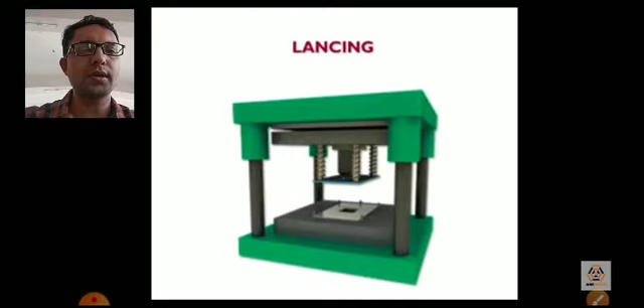So, let's start. First of all, there is a lancing operation. It's a sheet metal operation. This picture shows the machine in which we have done the lancing operation. Now, let me see what we mean by lancing. The equipment used for this operation is the stripper plate, punch, and die. In every operation, we require the punch and die, and also there is a sheet and the stripper plate.

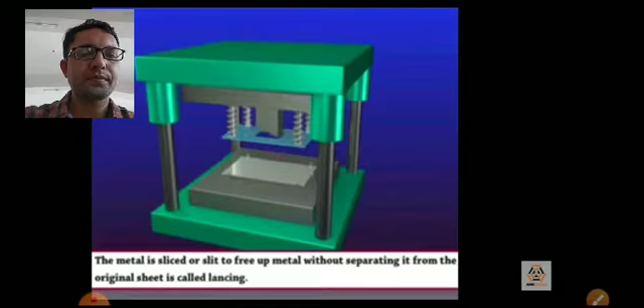The metal is sliced or slit to free up metal without separating it from the original sheet; this is called lancing. In the next slide, you will understand it in a better way. We have a separated sheet, but the sheet is not completely separate from the original part. That's simply called the lancing operation.

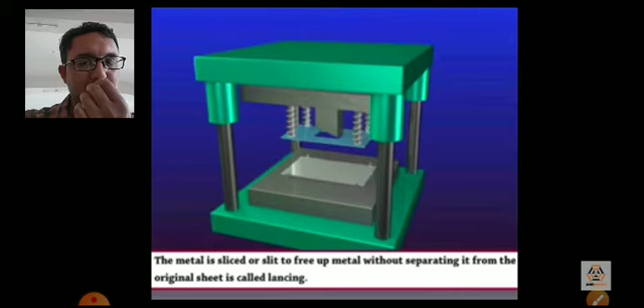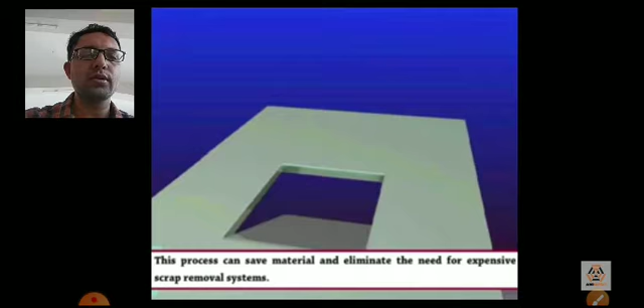Metal is sliced or slit to free up the metal without separating it from the original sheet; this is called lancing. As we have seen in this slide, no metal is removed and therefore no slug is created in this operation. So this process can save material and eliminate the need for expensive scrap removal systems.

The punch cuts the sheet partially and bends it down. Similar to the blanking and punching operations, here also we apply a punch on the sheet and it is cut, but it is not completely separated. It is cut only in slice form.

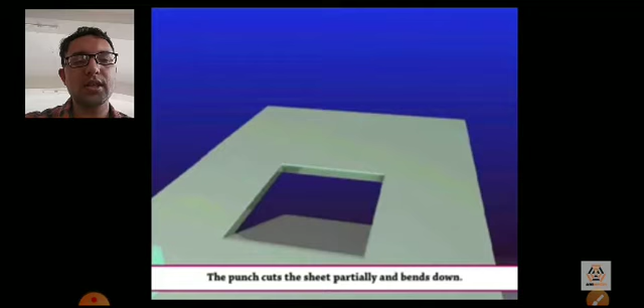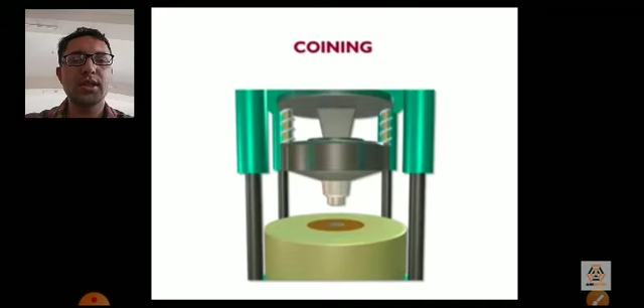Now, the next operation is coining, and coining is generally used to create a coin-type shape. This picture shows the machine on which we have done the coining operation, and coining is used to create raised surfaces and imprint the metal. There is one coin that we have put down, applying force with the help of the punch on the coin sheet, and it will create an impression.

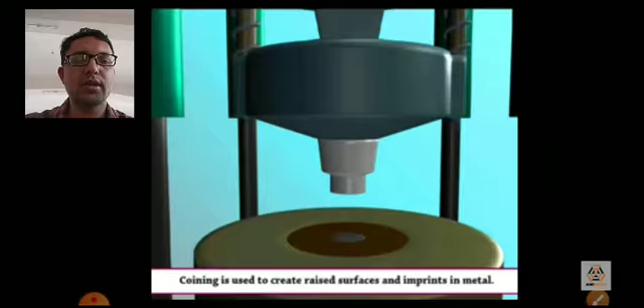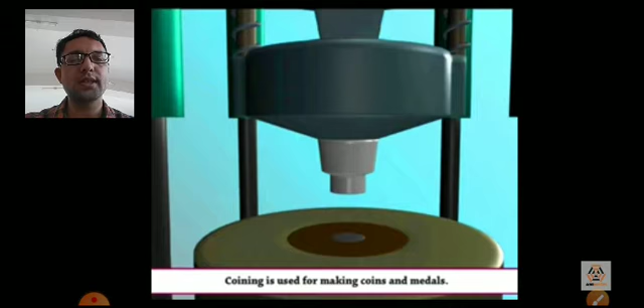So coining is used for making coins and medals. It's a very simple operation. It will create coins and medals. And after that, we have seen another operation in which an image is created on the coin.

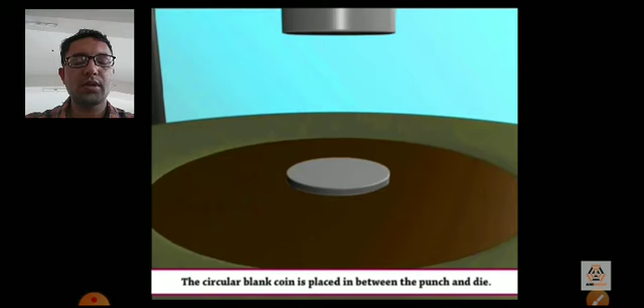The required impression is inversely imprinted on the punch and the die, and the circular blank coin is placed between the punch and die, the punch is applied from above, and we get the coins. The coin is pressed with high pressure, about 1600 megapascal, to get the required impression on the coin.

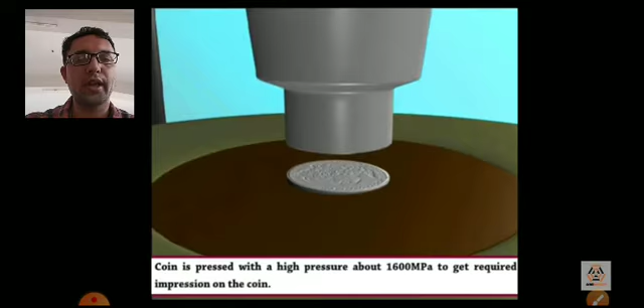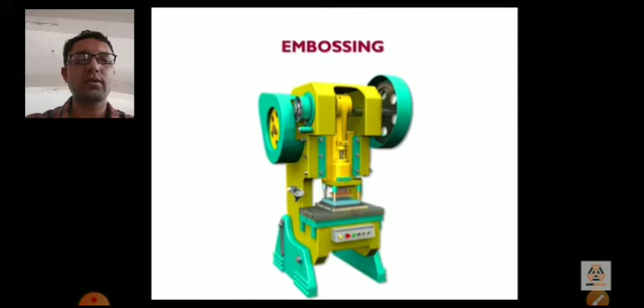Now the next operation, used to get an impression on the coin or on any type of material, is called embossing. These are the simple machines. In this also there is a punch, die, and similar components used for the images. Embossing deforms the shape within the part, but without thinning of the part material. It deforms the shape, right?

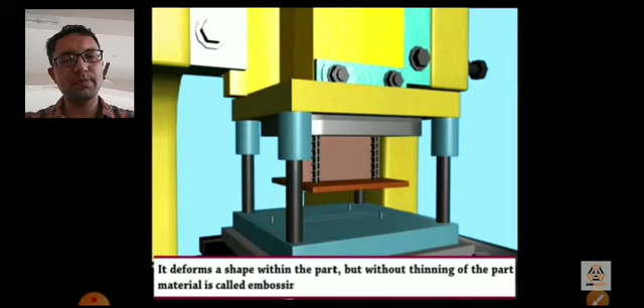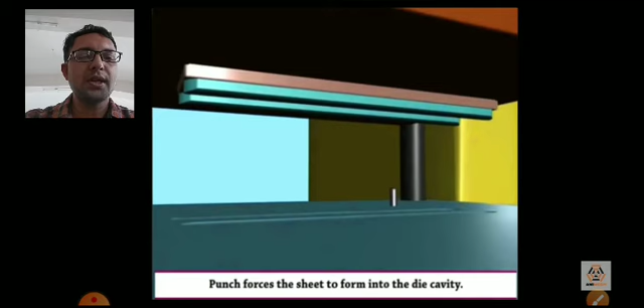So these are the embossing punch, the stripper, and the die, and we apply forces. The punch forces the sheet to form into the die cavity, and we get such images, mostly used to create raised surfaces or lettering in the sheet metal. As you have seen on this sheet metal, these two images are created with the help of embossing.

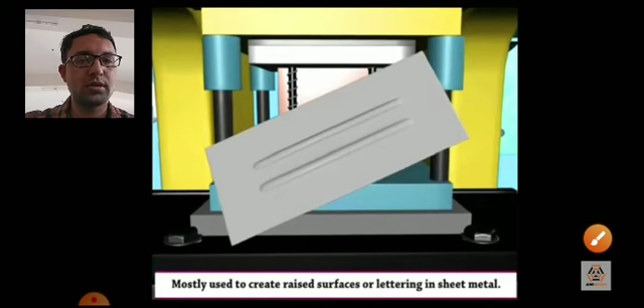So it's used to create raised surfaces or lettering in the sheet metal. The sheet is produced with raised surfaces without thinning it. That's simply called the embossing operation.

So for today it is enough. Your task is to write down these three operations of sheet metal working on your file page, and we will meet in the next lecture.